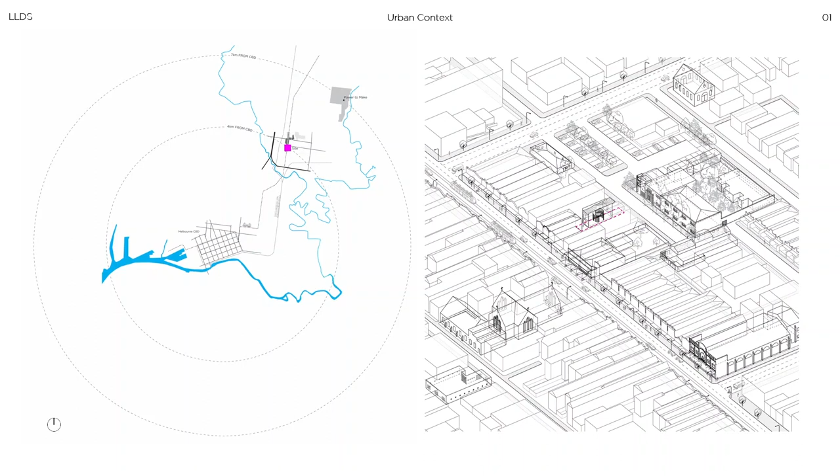Located a further 3 kilometers north is the workshop Power to Make, and this is the manufacturing side of our business. It is co-located with the design studio. Here we operate robotics and CNC machinery for architectural research, and in this project, we use it to prototype and build much of the building components.

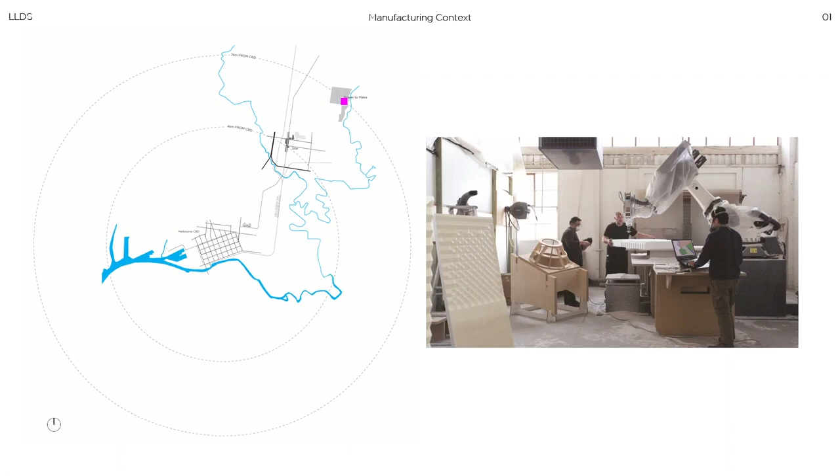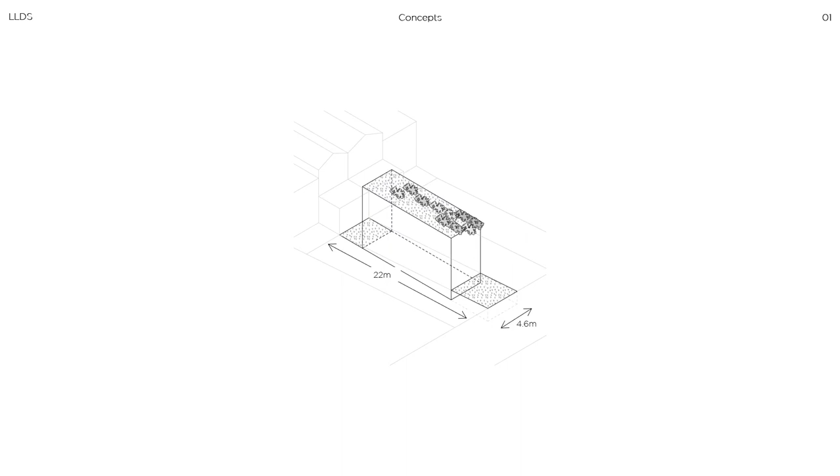So the design responds to narrow site conditions, 4.6 meters wide, 22 meters long. The concept is to elevate the ground so it creates a roof garden. The house looks to reconceptualize the terrace typology to bring daylight deep into the interior. So the entire house is 82 square meters. We start on the first floor of the house as we enter from the laneway and upper staircase.

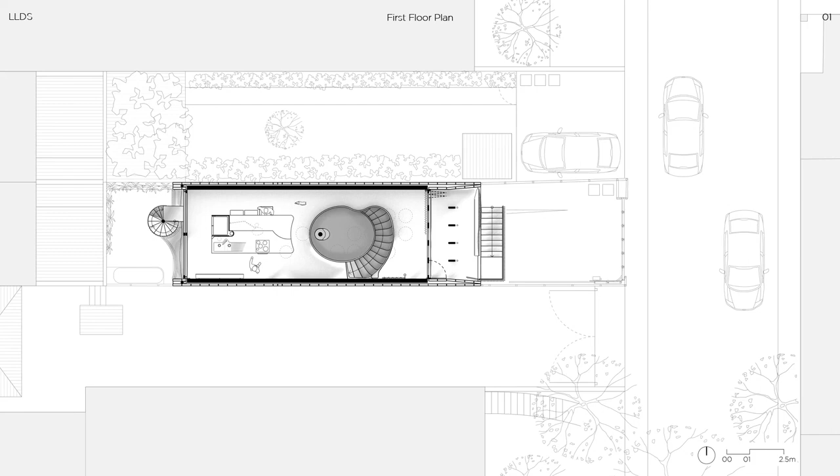The veranda space is deliberately loose in its program as it acts as a deep threshold to the large kitchen and dining hall. The timber stairs allow you to descend down into the snug. The snug with a wood fire heater is the center of the house. We use a circle as a primary spatial device to create the snug, and it is then mirrored to create 2 east and west bedrooms. And in between spaces are antechambers, vestibules, which contain wardrobes, bathrooms, and utility spaces.

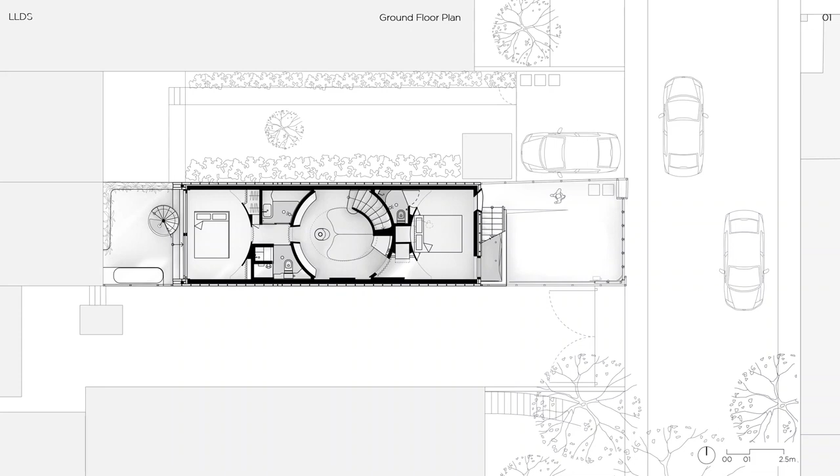So the rear of the house is a private courtyard with a rainwater tank, herb gardens, and a spiral staircase that takes you up to the roof terrace. The terrace is 9 square meters, made from recycled materials, and a green roof for ease of maintenance and also to contribute to the local ecology.

The section shows the 2 meter level difference across the site. The east bedroom has a vaulted concrete soffit to take the uplift of the roof, and the internal wall is highly textured with a pleat pattern to provide thermal mass and also disperse sound to reduce the flutter echo effect because of the parallel boundary wall conditions.

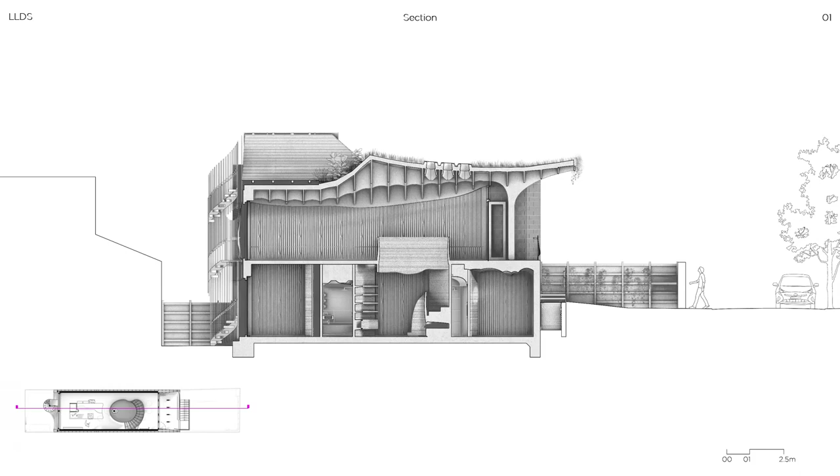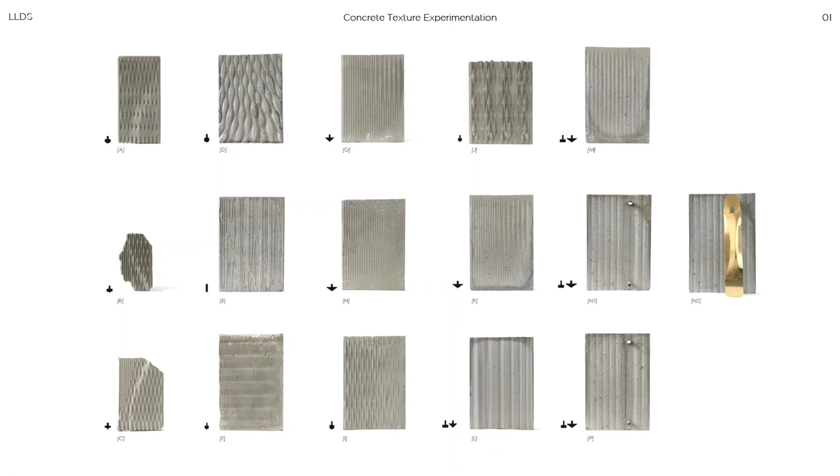At the early stage of the project, we experimented with the concrete textures using robot routing bits to create a pleated texture. The pattern is cut on the high R value PIR foam board, which is then later upcycled as insulation for the roof. We managed to convince our concreters to allow us to insert the PIR panels in between the Peri formwork on site, and the modular Peri formwork allowed us to eliminate construction waste. Most importantly, it also creates its own scaffolding for a very tight site.

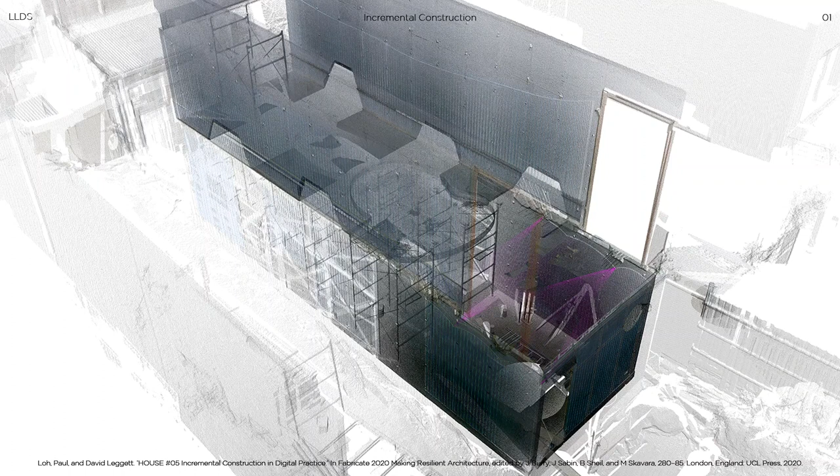So this is a photo of the large hall halfway through the build. It shows the day joint of the concrete pour about 600 mil off the ground. And in order for us to make sure the pattern is continued for the remaining pour, we scanned the entire site and readjusted the pattern to account for creep and tolerance on site to create a highly crafted surface.

The roof is made from cross-laminated plywood panels in collaboration with TGA Engineering. The asymmetrical roof shape responds to overlooking from neighbouring windows and maximises daylight to the interior. The deep roof structure is used to block out the harsh summer sun.

On the inside, we used 3 lines to define the perimeter of the roof. The central volume responds to the snug location, and the 2 straight lines respond to the concrete beam on the west and the bifold door on the east.

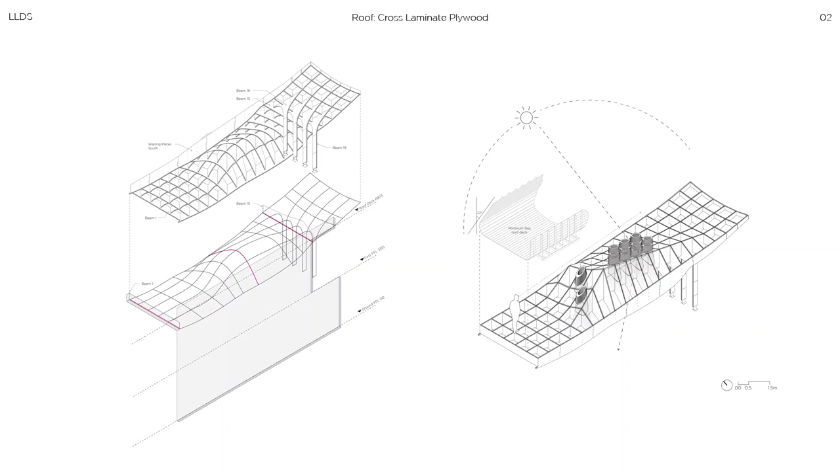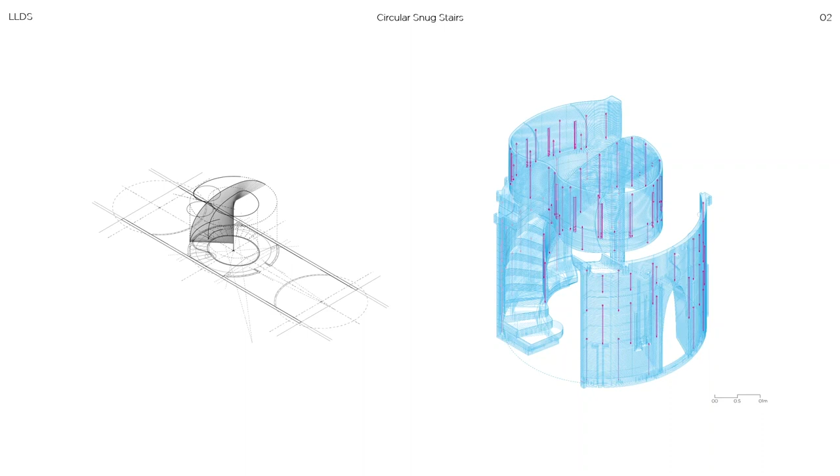The stair geometry is bounded by a circle on the lower floor and an elliptical opening on the upper floor. It consists of 237 layers of CNC milled FSC certified plywood. Threaded rods are used to clamp the entire structure together, in effect post-compressing the layers to minimize the use of glue. The structure is designed to be disassembled.

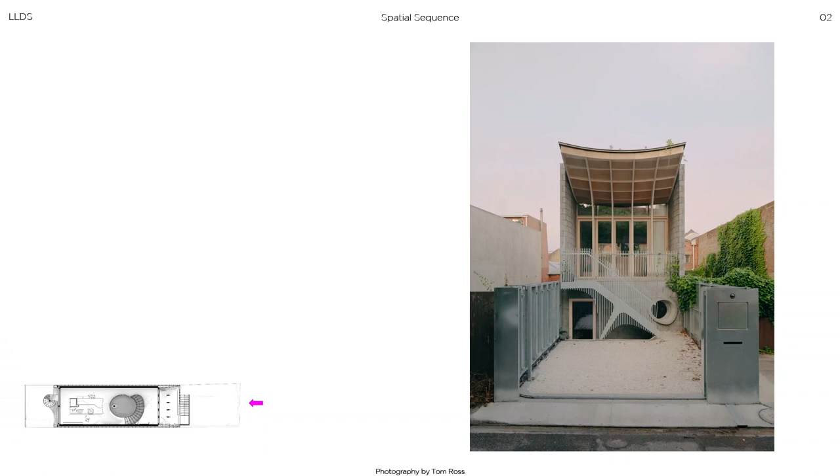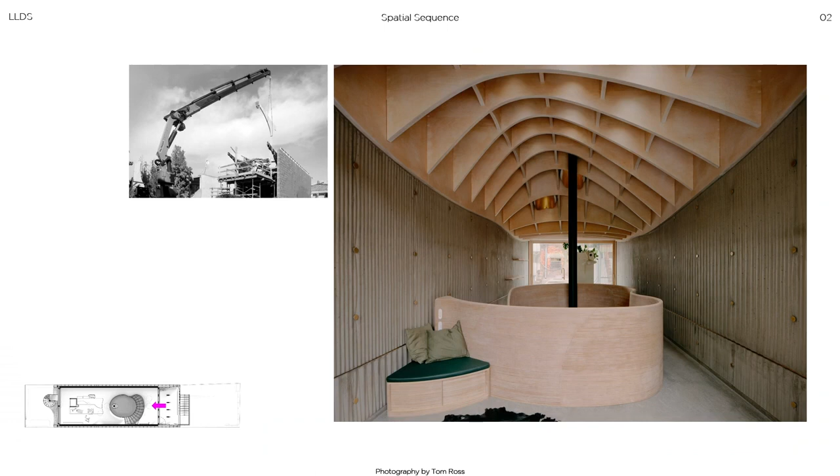The east and west facades are designed as giant trellis for planting to grow over the elevations. We will take you through the house to finish our presentation. Starting at the laneway, the half-sunken elevation with a stair leading to the elevated veranda, which has natural surveillance over the street. The hall-like dining room with a plywood laminated roof.

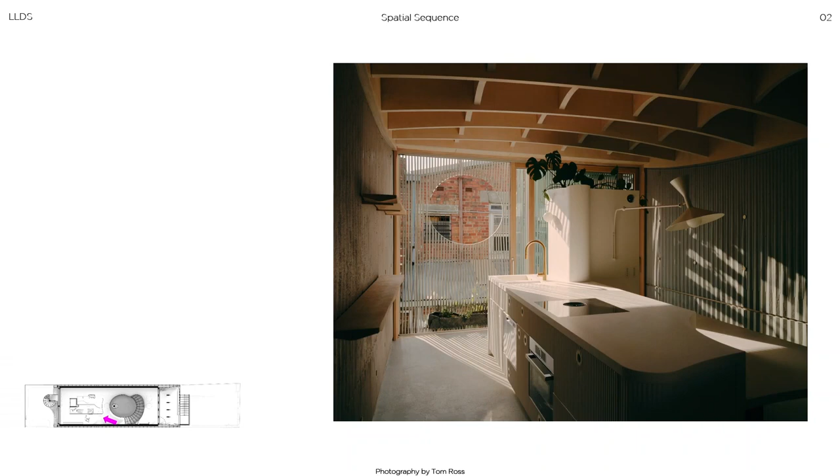On the right is a shoe cubby with matching plywood layers and an upholstered seat. The compact kitchen and dining island where the ceiling lowers to create an intimate space. The solid surface door fronts have been surface milled to respond to the pleats in the concrete. The holes left over from the concrete ties are used as a flexible pegboard for joinery, and when not in use are covered with a brass disc.

A view looking back at the east elevation, borrowing the greenery of the neighbouring facade. The black column is the flue from the wood burner in the snug. By rising up through the void, it's able to heat up both floors. The unprogrammed veranda space with the pleated concrete texture. Here you can also see the brass inlay to the day joint.

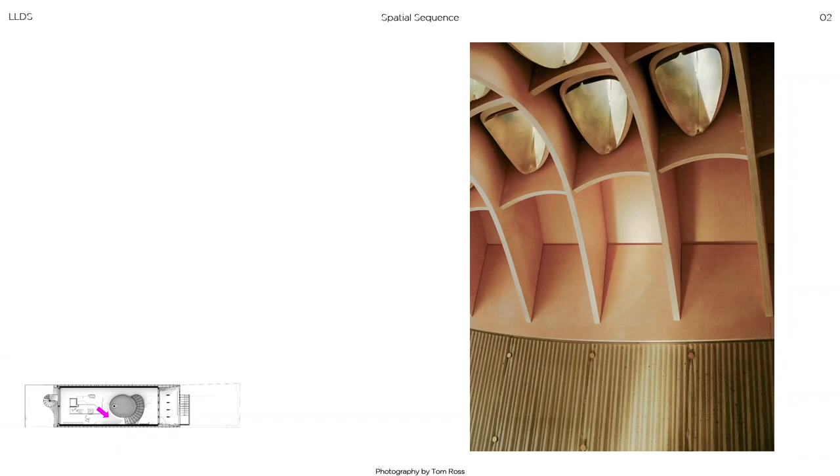13 roof lights bring daylight to the interior. Each one of them is lined with brass and installed using augmented reality. During the equinox, the light bounces off the brass to create mysterious glows on the wall. A view looking down into the snug with a giant cushioned floor. The tops of the stair treads are lined with brass, which will tarnish and scratch over time.

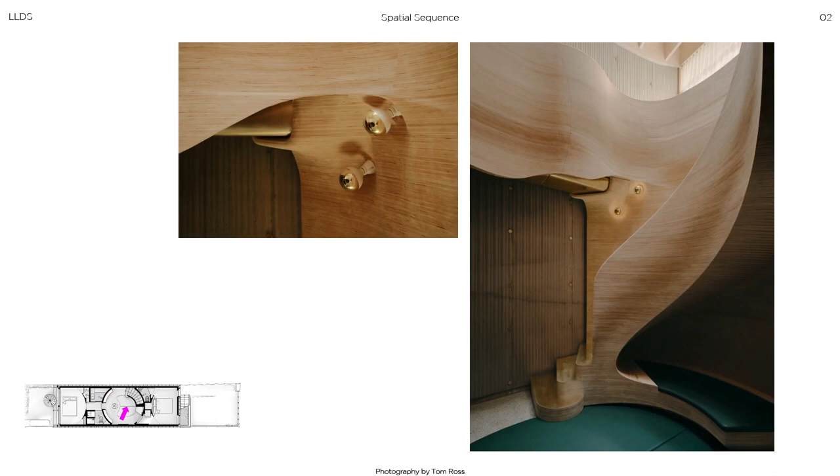The layering of the stairs. The brass conduit conceals air ducts for the heat exchanger. The geometry of the stair indents where the wall lights are positioned. A view from under the stairs shows the pleating of the timber layers as it transitions from the smooth curvature of the balustrade to the wall layer. A view looking up from the snug to the roof beams and the skylights.

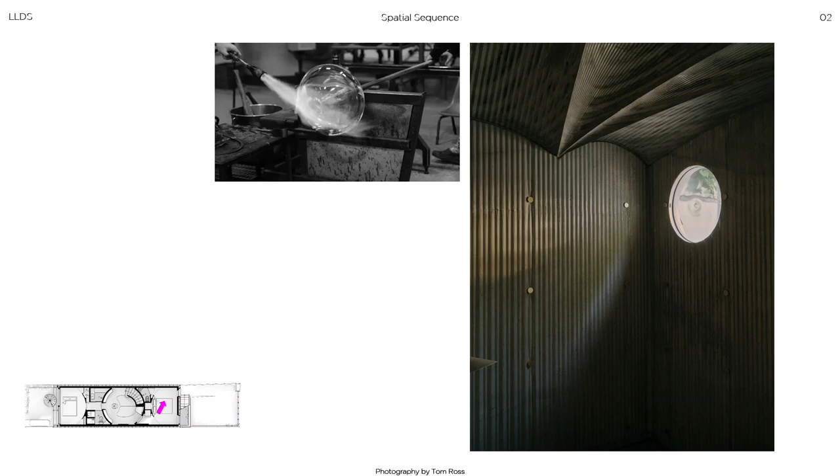The east bedroom with vaulted concrete soffit takes the load off the roof above. You can see the pattern aligned thanks to the digital feedback process of using point cloud scanning. There is a circular window to the northeastern corner of the room to pick up the morning sun. It's a mouth-blown glass piece by artist Ruth Allen.

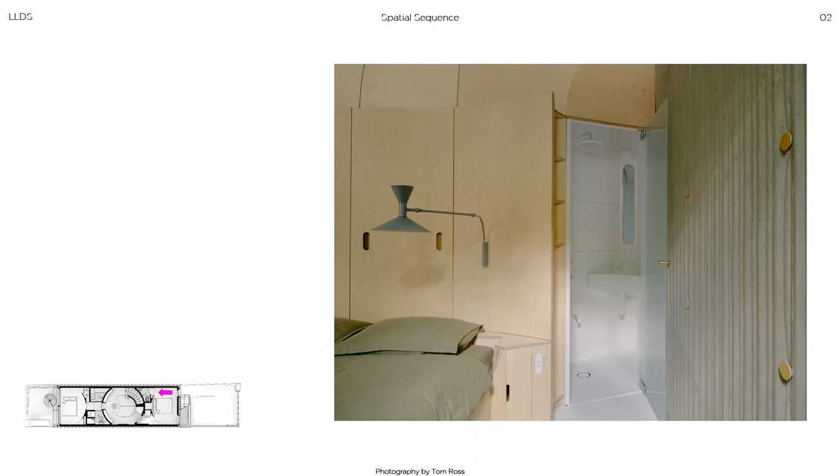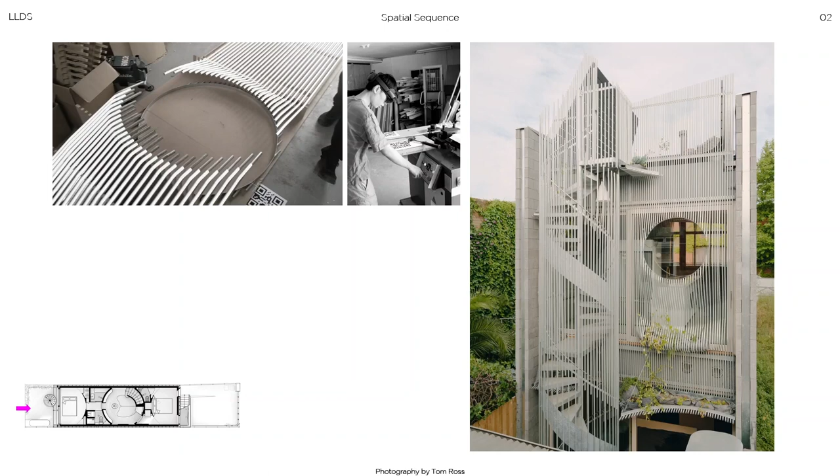The glass distorts the light entering the room to give a soft glow. The morning ritual of using the ensuite benefits from this soft glow. A view of the soffit with the ensuite showing a textured ceiling to match the concrete soffit. A view of the rear courtyard towards the west bedroom showing the rain shelf and the outdoor shower below the circular stairs. And we finish off at the west elevation showing the trellis-like facade for planting.